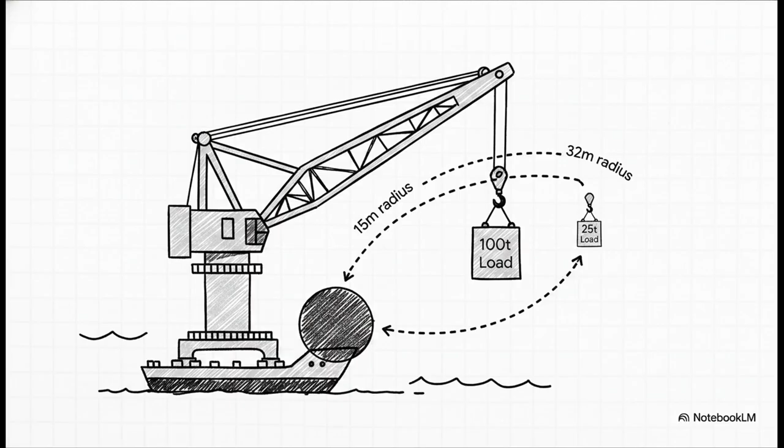Section 1. Let's establish the parameters of the MacGregor crane and the key specs of the HMC 3586 LKO system. We're looking at a system with a max lift capacity of 100 tons at a 15-meter radius, and it can push 25 tons out to an extended 32-meter radius. The whole shebang rotates on a slew ring over 3.5 meters in diameter, with an estimated total weight of 256 tons. These numbers really highlight the massive, highly dynamic loads that are constantly being transferred right into the pedestal.

What's really fascinating here is the view from the cabin. From up here, operators manage these colossal loads while having to constantly account for critical vessel stability constraints, including a maximum combined list and trim of 5+2 degrees. It's a high-stakes balancing act.

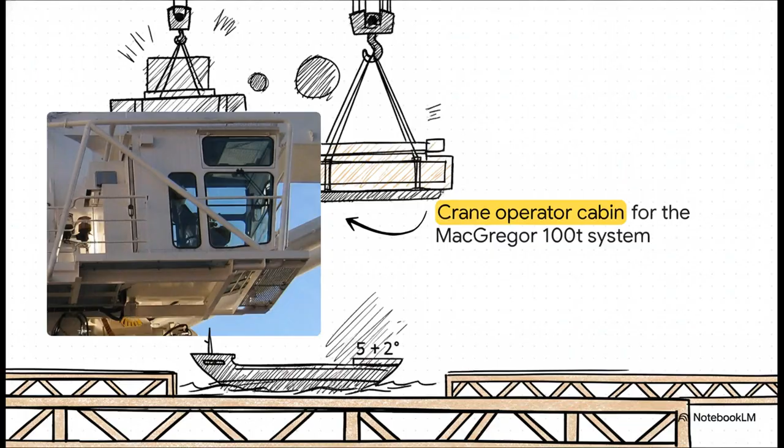Now, absolutely crucial to these offshore operations is the active heave compensation, or AHC system. This tech relies on a motion reference unit tucked inside the crane's pedestal control cabinet. It calculates the vessel's vertical pitch and roll movements and dynamically compensates for them in real time. This is what keeps subsea loads completely steady relative to the seabed, no matter what the ocean is doing.

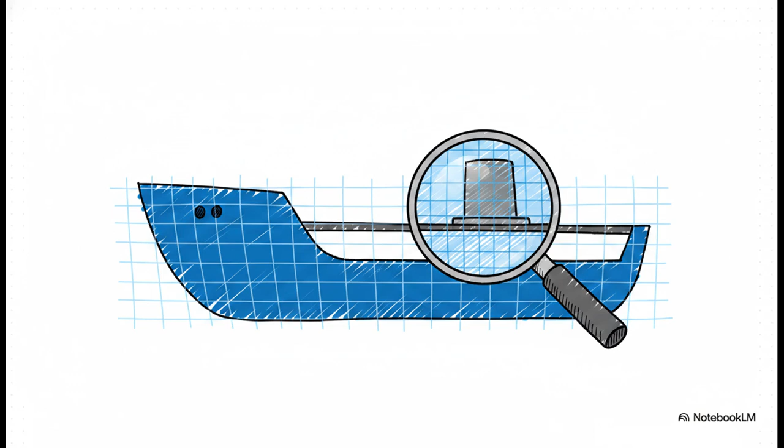Section 2. Let's look at our finite element method modeling and how we idealize the MT-6012 hull structure. To get an accurate picture without melting our computers, we use a dual mesh approach. Notice the contrast here. We've got a general, relatively coarse 300 by 300 millimeter mesh for the wider hull structure. But we drill down to a highly refined mesh right at the crane pedestal, keeping those element dimensions strictly under 100 by 100 millimeters. For the structural engineers tuning in, here is exactly how we modeled the foundation stiffness.

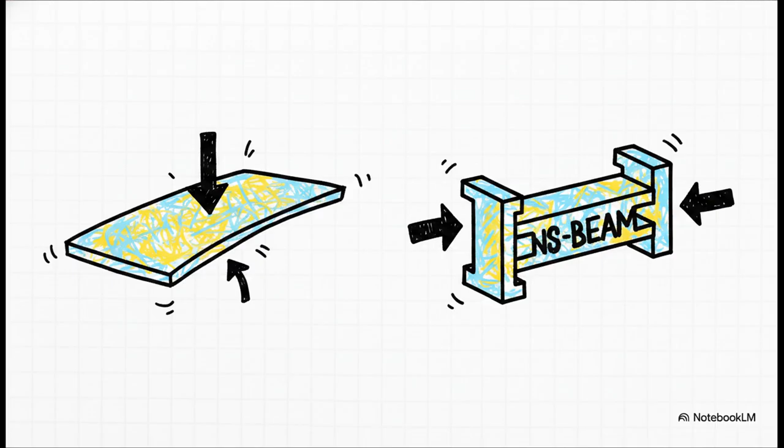We used 4 and 3 node shell elements for the plating and web plates to perfectly capture membrane and plate bending effects. On top of that, beam elements with eccentricity were applied for the flanges of longitudinals and stiffeners. This combo gives us a highly accurate model of both bending and axial stiffness.

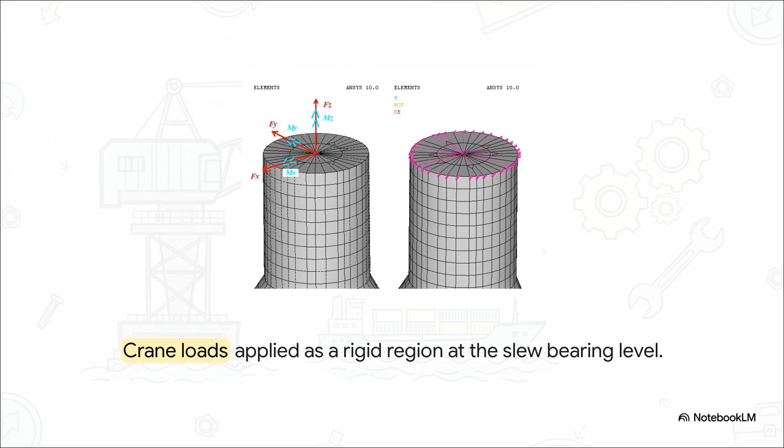Section 3. Setting the model boundary conditions to prevent rigid body motion. This image beautifully illustrates our coordinate system and exactly where the forces hit. The crane loads are applied as a rigid region right at the slew bearing level, exactly 17.6 meters above the base plane. You can clearly trace the direction vectors for the horizontal, vertical, and overturning moments.

The make or break detail for our boundary conditions is how we prevent rigid body motion. We locked the model down completely by fixing all nodes in the planes of frame 26, frame 53, and the centerline plane across all degrees of freedom. This setup perfectly mimics the interaction with the adjacent, unmodeled ship hull structure.

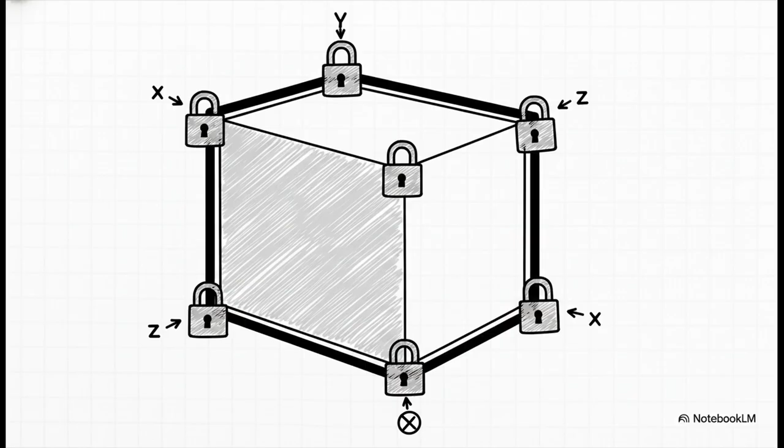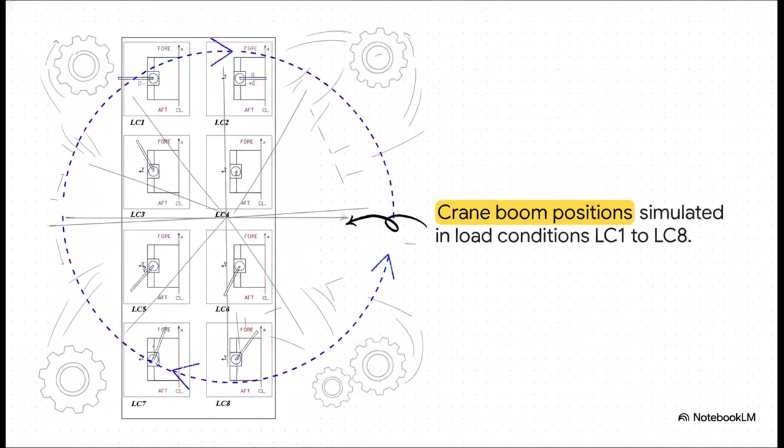Moving to Section 4, let's get into the 8 boom loading scenarios and really stress test this foundation. To prove the integrity of the deck reinforcements, we couldn't just test one position. We simulated 8 specific load scenarios, from LC1 through LC8, rotating the boom in 45-degree increments. This full 360-degree sweep is absolutely vital for uncovering any hidden structural vulnerabilities in the transverse or longitudinal framing.

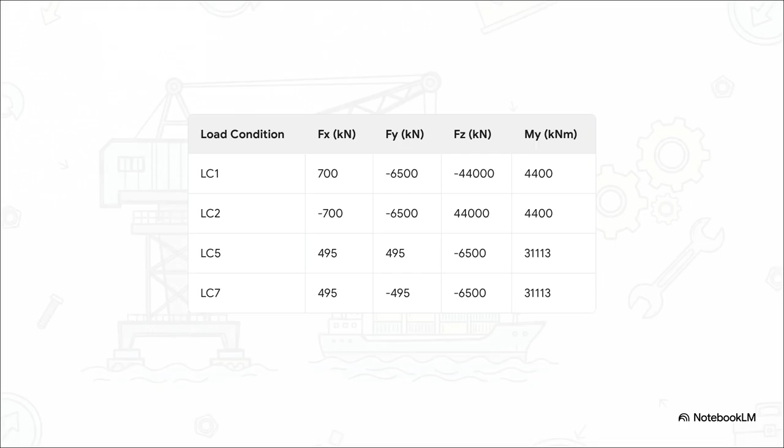Section 5. Evaluating allowable stress limits by comparing our results directly to DNV standards. We benchmarked our results straight against DNV rules for ships. For transverse members outside concentration regions, the allowable normal stress is capped at 223 megapascals, and the allowable von Mises equivalent stress is 250 megapascals. These are the absolute structural yield boundaries we are working within.

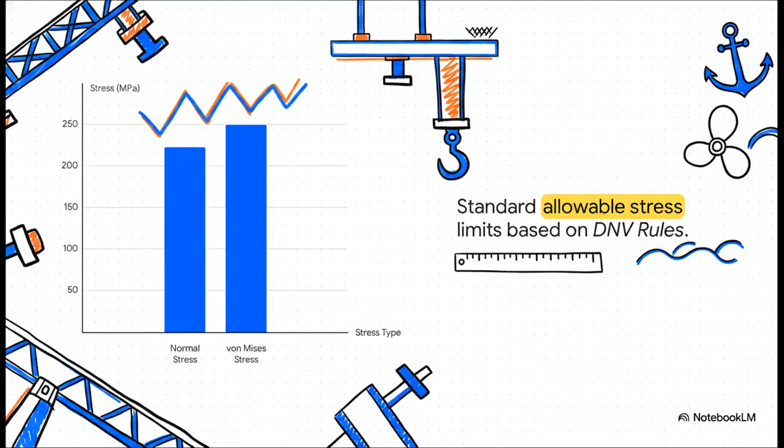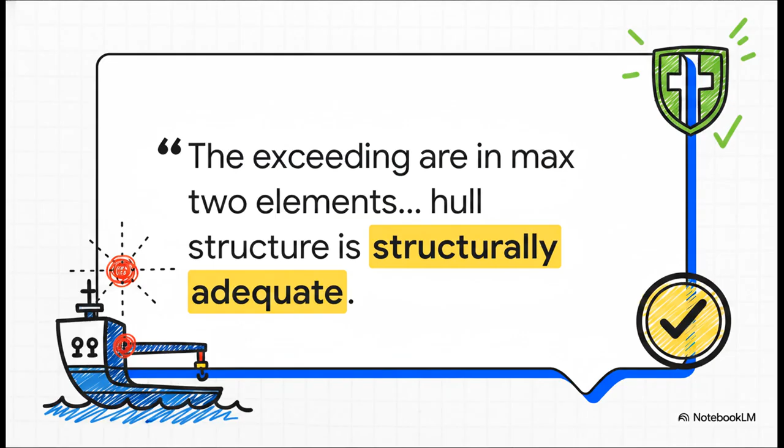And here is the major takeaway for the engineering team. The analysis confirms structural adequacy. Now, yes, under load condition 1, equivalent stresses do marginally exceed the yield limit right where the sideshell plate meets the pedestal. But, and this is the key point, those exceedances are limited to a maximum of 2 finite elements, and the stress drops off incredibly fast in the surrounding elements. Because it's a highly localized peak, the structure is deemed fully adequate under DNV rules.

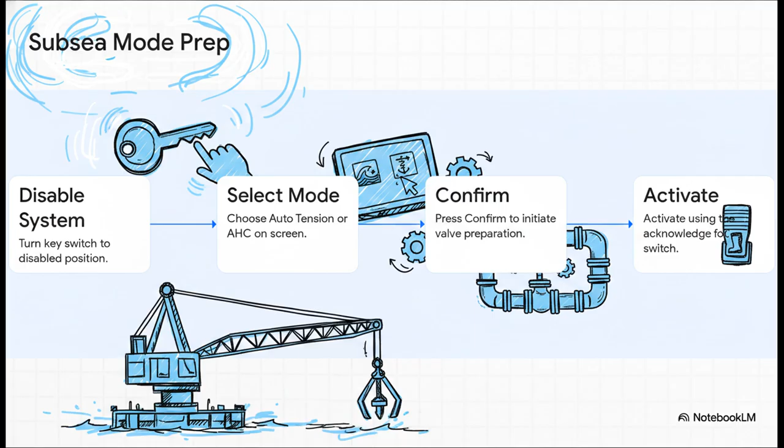Section 6. Operation modes and maintenance, or how we safeguard the crane's life cycle. For the operator in the chair, engaging advanced subsea modes like auto tension requires a very strict sequence. First, the running system has to be disabled via the armrest key switch. Only then can you select the mode on the screen. Pressing confirm kicks off the background valve preparation, and finally, the operator physically activates the mode using an acknowledge foot switch. This multi-step process ensures those massive forces we just talked about are applied smoothly.

To maintain the structural integrity we just verified, the preventative maintenance timeline is rigorous. Every 3 months, or 500 hours, crews must inspect the hydraulics for leaks, vibration, and abnormal noise. Annually, emergency functions are tested and checked for corrosion. And every 5 years, major components require a complete overhaul by authorized technicians.

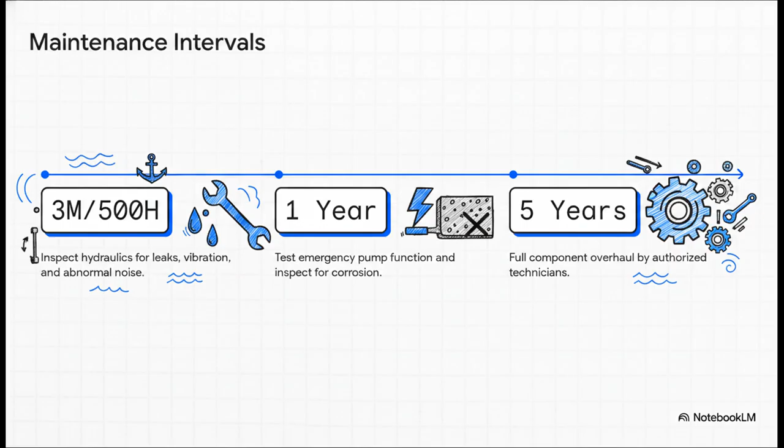Which brings us to a final, crucial point. The manual strictly states that using third-party parts completely voids the MacGregor warranty. But I'll leave you with this question to ponder. Beyond just losing your warranty, how exactly does using unverified, non-genuine parts threaten the hard-earned structural safety margins we just proved with our FEM analysis?

Throwing an unknown part into this system isn't just a paperwork issue. It's a fundamental structural risk to the entire vessel. Something to really think about the next time you're reviewing a maintenance log.